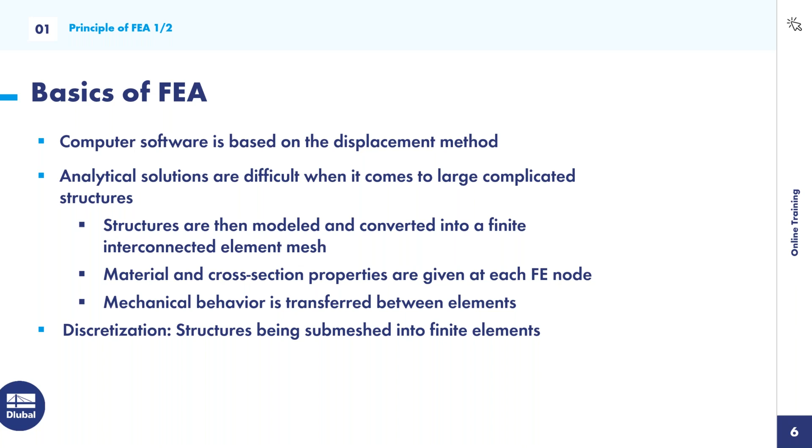The next thing to briefly get into is the FEA calculation workflow. Now, I'm no expert on this, and I just want to give you the overview and the basic general knowledge of how the workflow is listed in step-by-step form and how it works within an FEA calculation.

The first step the program goes through is determining the local element stiffness properties. Second, the program changes stiffness properties at each node and converts this into the global coordinate system. Then the composition of the entire structure takes place. Boundary conditions or supports are then defined, and these can consist of sliding supports, rigid supports, and hinge supports, for example.

Fifth, the displacement vectors can be determined by solving the system of equations, just like we spoke about. And lastly, the support forces and internal forces can be determined, aka the results of the structure. So with the general knowledge of how the workflow works for FEA, we can dive into our next example, which will be our continuous plate example.

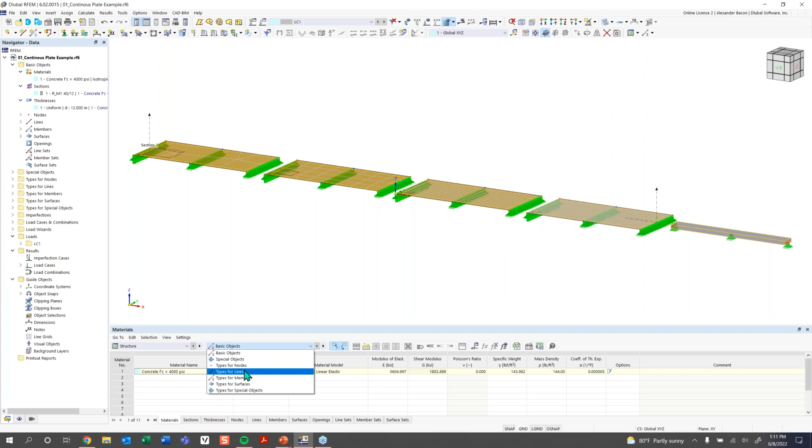And basically anything can be edited down to the coordinates of a node. So if I go to basic objects and node, you can see we have our coordinates for our nodes here, and these can all be adjusted. Also within the tables, if any design work is being done, this is where all of the input data and results are going to be shown.

Next, you may notice that my background in my work window is white. Sometimes it can be black by default, if you've just recently downloaded RFEM. The color of the background can be changed to whatever you would like. So for example, if you go up here to options and you prefer a black background or a white background, that's under display properties here. And in the general category, we have background here. And then you can see you can change your background color to almost any color you'd like. So I'm going to keep mine as white, as I think for presenting it allows you guys to more easily see what I'm working with.

And that leads into the work window. So here's the work window. I can rotate my model, I can play around with it, I can manipulate it. So the work window is where almost all of your modeling will get done. Right now I have my grid turned off. If I turn my grid back on down here, you can see I have my grid points and everything. So this is basically where all of our work will be done and all the modeling will be done.

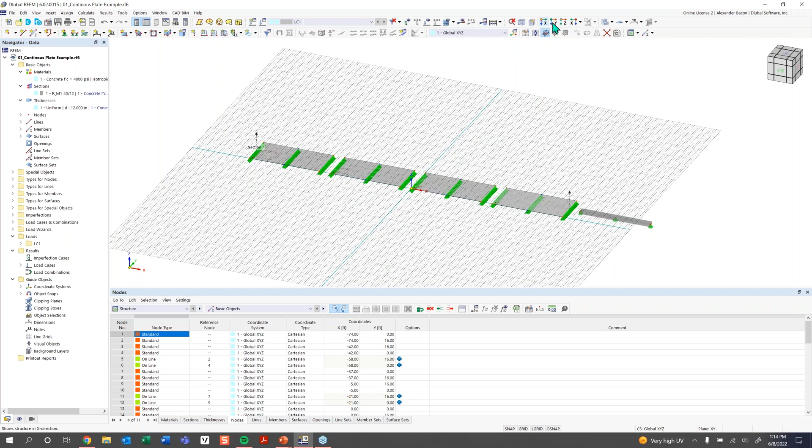Next we have the views up here. You can use these view buttons to change the view of your model, like so. A new addition is the cube up here, which also allows you to change your views. So this is one way to look at and change the view of your structure. You can also hit this button and it will give you an isometric view as well.

Next, in the navigator here, right now we're looking at the data panel. There are multiple tabs down here in the navigator. The first tab is called data. The second tab is called display. Within this display tab, I can collapse all of these subcategories, such as model and results. The display tab just allows you to turn graphically off and on anything that's shown in the window here.

It doesn't deactivate or remove anything from your model structurally. It just deactivates the graphics. So if I went under model here and turned off surfaces, you can see the surfaces disappear. This doesn't actually remove the surfaces from the structural analysis portion, it just turns off the graphics. So here is where you can turn things on and off graphically. You can turn numbering on and off. So that's the display tab.

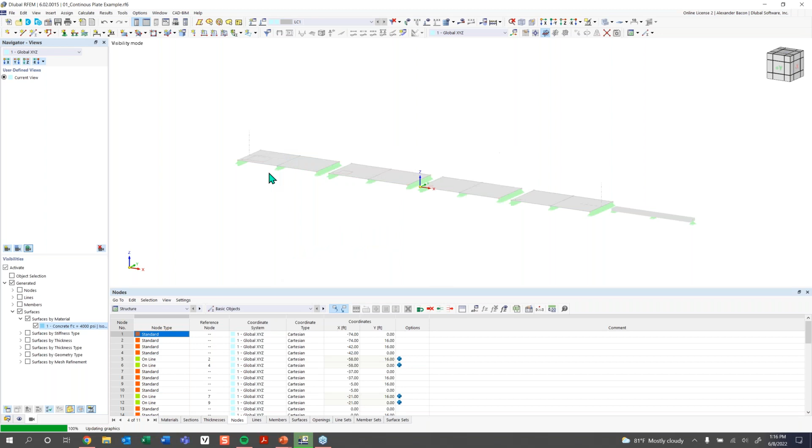Next, we have the views tab. This works a little bit similarly to the display tab, but with a function called visibilities, which can be activated. Once I activate visibilities, I don't have anything visible in my model that's deactivated. But let's say I only wanted to view surfaces that have a concrete material. Once I activate the,

Okay, so a little bit of a crash there. Let's just reopen RFEM by closing out of that. And we can open RFEM back up. Sorry, everybody. One second.

While that's opening up, which should only take a couple seconds, we can give a poll. Throughout the training, I will be giving questions, and I would like to give this question. That will launch now. If everyone could read it and answer it, then we can go over the results and correct answer afterwards. I'll give everyone a minute to do that, and we can continue after that.

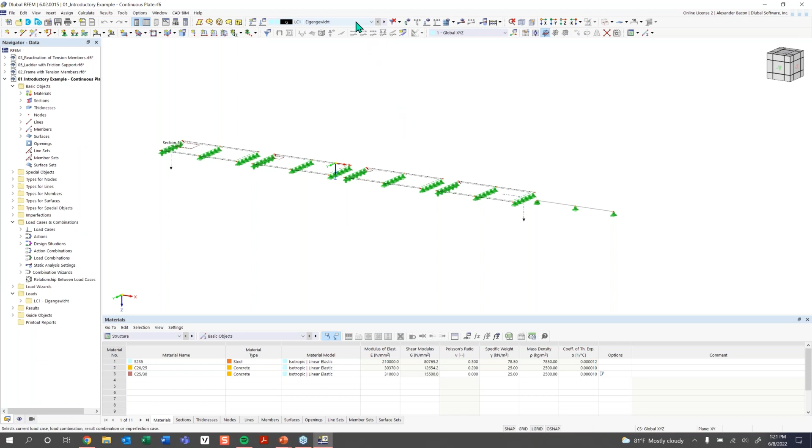Now jumping back into RFEM, the next thing I want to do is quickly run an analysis. We're just going to run the results of this model real quick.

And then we're just going to quickly go over the results, nothing in detail. So I just wanted to show you that once the results are run, this fourth tab here in the navigator panel is going to appear. As you may have seen before, we only had 3 tabs, but now that the results have run, we have 4 tabs.

And then you're going to see these collapsible categories here. So we can either show our deformations, member results, or surface results. And this is how you turn on and off the results you would like to see in the work window on the right-hand side here. So things like member internal forces, such as normal axial forces, shear forces, moments, torsional moments, things like that you can view on your members. And same with surfaces, you have internal forces and stresses, etc.

And also, when you're manipulating your model within the window here, if you have a mouse with a scroll wheel, you can click down on that middle scroll wheel button to move your model in translation. You can hold Control and click the middle mouse button to rotate the model, and then you can use the scroll wheel to zoom in and out.

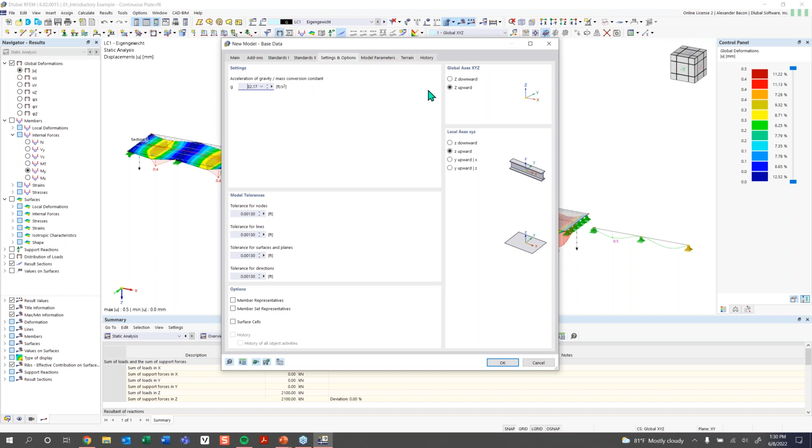And now everything else we don't need to worry about. These other tabs we're going to skip for now. And all we need to do now is click OK. So once we click OK, a blank model will open up. Sometimes materials from other models can be carried over into this blank model. So I'm just going to go under here and delete those. Maybe some other sections can be carried over as well that are previously defined. I'm also going to delete those along with some thicknesses that were defined as well.

So now you can see in my work window, I just have a blank grid here. Now this grid can be customized. So let's go into the settings for the grid plane here. You can see we have grid points here. So if we go up here to this button, settings of work plane, grid/snap, etc. If we click on this, we can take a look at our settings for our grid here. So right now, the basic information is that we have 50 by 50 grid points here. Right now, my units are in meters, as you can see. So those points are spaced by meters.

I know this is an international training, so that's why I want to show you that we can switch between imperial units and metric units. And you can do that in almost any dialog box. So you can see there's this button down here, units and decimal places. If we click on that button, you can see under model, all of my units that are related to modeling are all in metric right now.

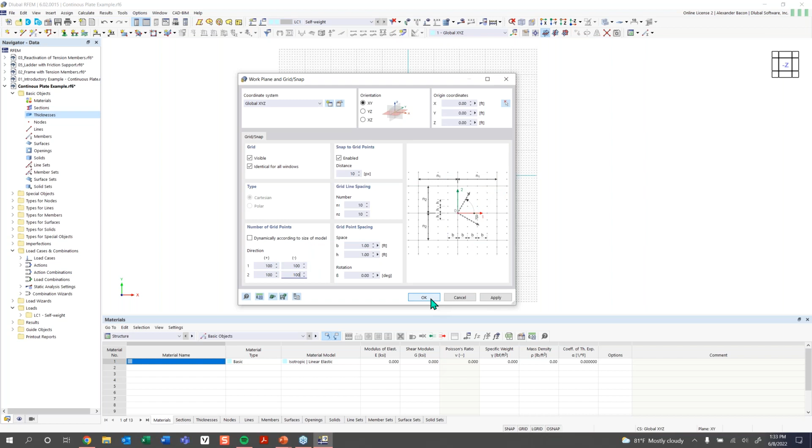For this model, I would like to change this from 50 by 50 to 100 by 100. So we can take that and I can just copy and paste the rest of this. So in the positive and negative direction and in directions 1 and 2, which you can see in this graphic over here on the right-hand side to help you understand that, it's going to be basically a 100 by 100 grid. So I'm going to click OK. And now you can see my grid here is, just going to save this real quick.

You can see my grid here is 100 by 100 now. Now that we have the grid set up correctly, we can start to model our first continuous plate. So I'm going to zoom in here.

I'm going to go up here to New Rectangular Surface, and this is the first tool that we want to use. So I'm going to click on New Rectangular Surface to create this continuous plate, and now you can see this dialog box will pop up called New Rectangular Surface.

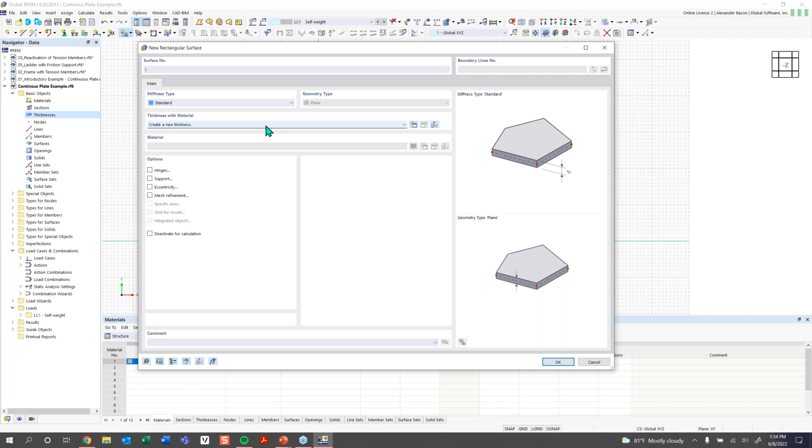We just need to define a material for this surface and a thickness for this surface. So first, we need to define a thickness. I'm going to click on Create a New Thickness here, and the new thickness dialog box will pop up. Basically with the thickness, you can see what that is defining on the right hand side here.

Normally you can think about this as with a beam member or column, that column requires a material and a cross section. So as an analogy, you can think of the thickness as the cross section, and then we just need to give it a material. So every surface requires a thickness and material. We're going to make the thickness of this surface 12 inches.

And then we're going to go here to material. When choosing a material, you want to click on the button Import from Material Library. Under the Material Library, you can see there is a filter section on the left hand side here. You can see you can filter by region, and we have a long list of regions that you can pick from to find your material.

For this training, I'm just going to use some US materials. So I'm going to click on United States, and then I'm going to click on material type, concrete. Once I filter to the material type that I would like, you can see for concrete, there's the subtype of material. I'm just going to choose regular old concrete. And then the standard, we have the ACI for the American standard for concrete. You can see I can choose between different older standards or the newest standard. I'm just going to choose the newest one.

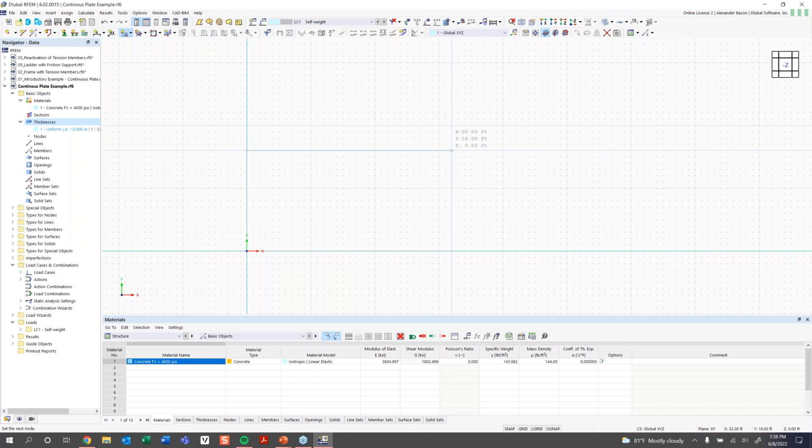So we're going to first snap to the origin here. I'm going to left click on the origin, and this first surface is going to be 32 feet by 16 feet. So I'm going to go 32 feet in the X direction, and then 16 feet in height. With the rectangular surface, all you need to do is define 2 corners, and so now you can see my surface is defined. Now all I need to do is either hit escape, or I can right click anywhere and simply exit out of that tool. Now the next thing we want to do is draw a line down the center, directly in the middle of this surface.

To do that, we can go up here to the option New Line. So you'll see the New Line tool will pop up, and now I can simply snap to the center of the top of this line here, left click, and just draw this line on top of this surface like so.

So that's how you can create a new line and draw a new line. We can right click out of that, and right click again to exit fully out of that tool.

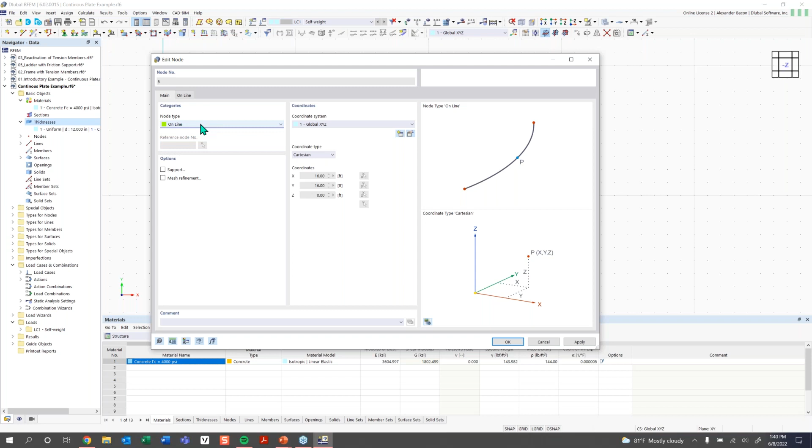Now you may notice that these nodes here are a different color compared to the corner nodes. If we double click on one of these nodes to edit them, you can see these nodes are set to the node type On Line. This means if I click OK, these nodes are integrated into the line they're connecting to. If I double click on this line and go to the Nodes On Line tab, you can see the node is being recognized and connected to the line I'm editing. If this node was set to the normal standard type, it wouldn't be integrated into the line it's connecting to. This is done automatically, but it's good to know there are different node types.

Now that we have our concrete surface here, we want to support it. So we want to continuously support the left-hand side of this plate, which means adding a line support to this line on the left-hand side.

To do that, we can double click on it to edit it, and we have a list of options here. We want to add a support to the line, so this tab, Support, will pop up. Under line support, we can hit this dropdown, and you can see we have a couple of preset definitions for what our line support should be.

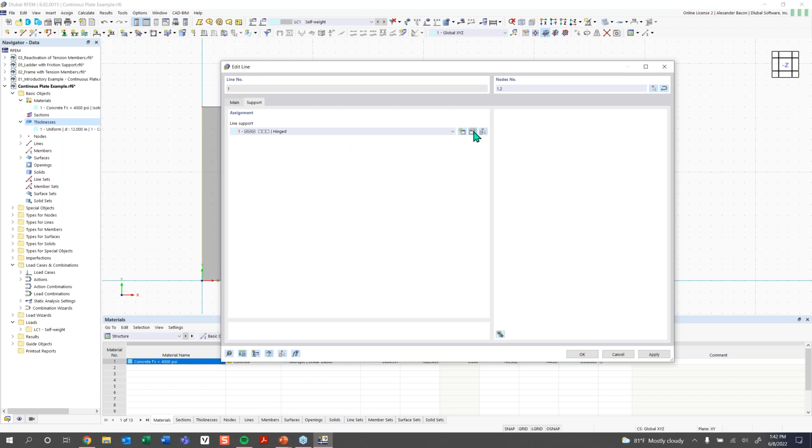I want this to be a hinged line support, which means the first three translation degrees of freedom are fixed, so the support can't move in the X, Y, or Z directions, but rotation is fully released. That's a hinge support, and this is what it's going to look like. We'll click OK, and click OK again, and now if I rotate the model, we have our side fully supported by those hinge supports.

Another thing to point out is if I double click on my line here in RFEM, you will always see the nodes making up your line. Also if I edit this line support, you always see the assigned line that goes with it. So in RFEM, you're always going to know what objects are connected to each other by this upper right hand corner, which helps you understand what's connected to what. So always check there.

Now we can highlight the other two lines we'd like to add supports to. If I hold Control and select these lines, there's also a button up here called Assign Line Support. I'll select that tool, and RFEM remembers my selection before I clicked on it. You can see lines 3 and 5 are selected.

None of these presets are the definition of line support that I want, so I can create my own by clicking the new definition button. I want this support to be able to slide in the translational X direction, so I'm going to uncheck UX, which fully releases that direction in global X, but it's still supported in Y and Z, and rotation is still fully released about the X, Y, and Z axes.

I'll click OK, click OK again, and now you can see those supports are added to my lines there.

Next thing we want to do is create a surface load, but before we can do that, it's very important to know that any loading applied to your structure must have a load case assigned to or associated with it.

So the next thing we want to do is create a new load case. You can see we already have our LC1 load case created by default—the program will always have a load case already created. What we can do is click on the edit active load case here to look at that.

So this is where you can create load cases. You can have multiple load cases, and these will go into your combinations. We're not going to get into that this training. We're just going to focus on one single load case here. It has no action associated with it. We don't need to worry about that since we're not doing any design or load combinations.

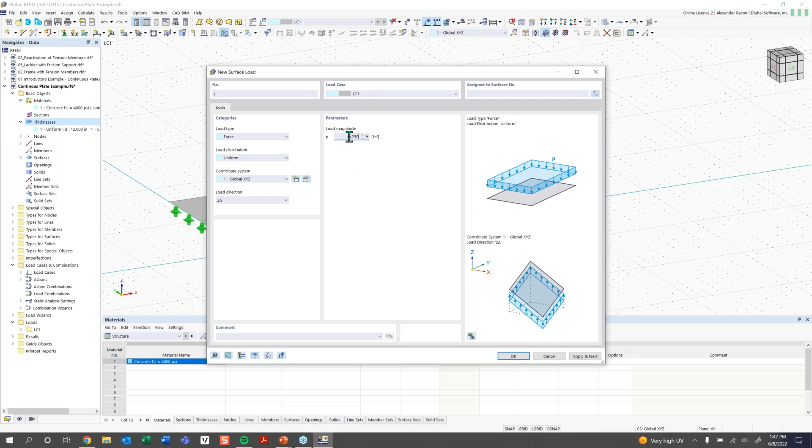So the loading, we just need to give it a magnitude. It's going to have a magnitude of negative 0.25 KSF, or kips per square foot. And we give it a negative, so it acts into the negative direction. So we'll click OK.

And then all I need to do is tell the program which surface to assign this to. So we'll assign it to this first surface here. And now you can see visibly or graphically our loading here. Something else you can do is right click on this loading and you can adjust the size of it using this slider here if you would wish to do so. So yeah, now we have our plate here, it's supported, it's loaded.

Next thing I want to go over is now the FE mesh settings, which are very important if you have a surface or any surfaces in your model. So to access the FE mesh settings, we can go up here to this button, hit this drop down, and we can access what's called the mesh settings here. And this is always important to look at before you run any results. You can see these are the general settings, and right now under target length of finite elements, this is set to 1.64 feet, and this is going to be the global length that a finite element is set to throughout your entire model.

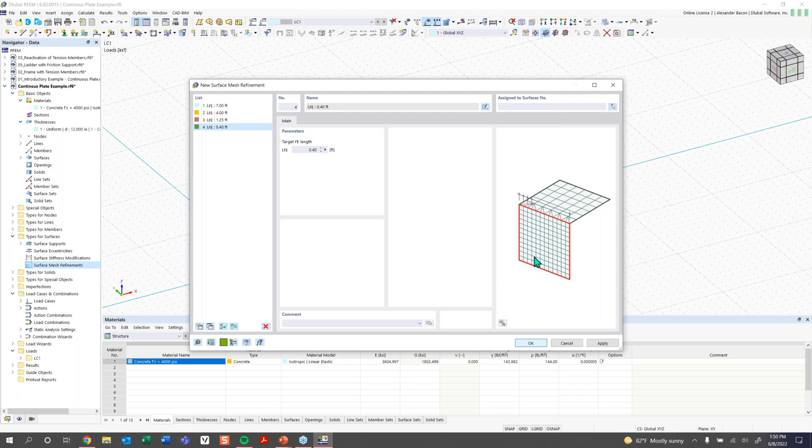And the next thing I want to do is make a copy of my surface here. So I'm going to highlight the whole thing here, and I'm going to use what's called our move/copy tool. With this tool, you can move something or make a copy of it, or do both at the same time, which is what we're going to do. We're going to create a copy, and we're going to create 3 copies of the surface. And we want to displace them 37 feet into the X direction. What this allows for is a 5-foot spacing between each of these copies, since the surface is 32 feet long. And so now all we need to do is hit OK.

And now you can see I made 3 more copies of my surface here with all these supports and everything, and they're each 5 foot spaced apart. So now with our copies made, we want to create our single member, or our beam member, that we're going to use to compare results to.

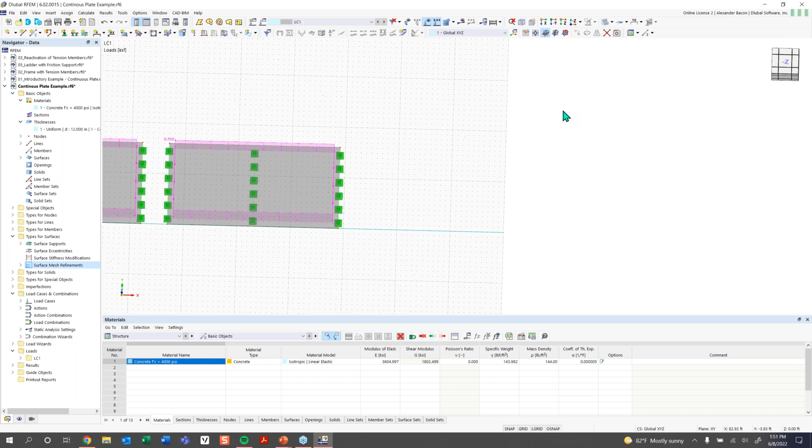Now to do that, you can see we're going off my grid here a little bit, so I'm just going to highlight all of these plates and drag them to the left a little bit so we have some space here on the right hand side to model the member. So I'm going to hit reverse z-axis direction, and then I'm going to go up here to the button create new member.

Under new member, we're going to use the member type beam. This member type allows the member to take tension and compression forces and have fully fixed connections. What we want to do now is tell the program what cross-section this member is going to have and what material it's going to be made of. So to define the cross-section, we can just go down here to section with material and click on this button, import from section library.

Now here is the cross-section library that's in RFEM 6. You have different categories here. The category we're going to be focused on is the massive category, which is where we can choose our massive rectangle section. And with this section, you can see we can define our material here. I already had a preset of our concrete 4000 PSI material, our isotropic linear elastic material. And if this wasn't already defined, you can click on the material library, and this is the same material library that we've looked at from the surface.

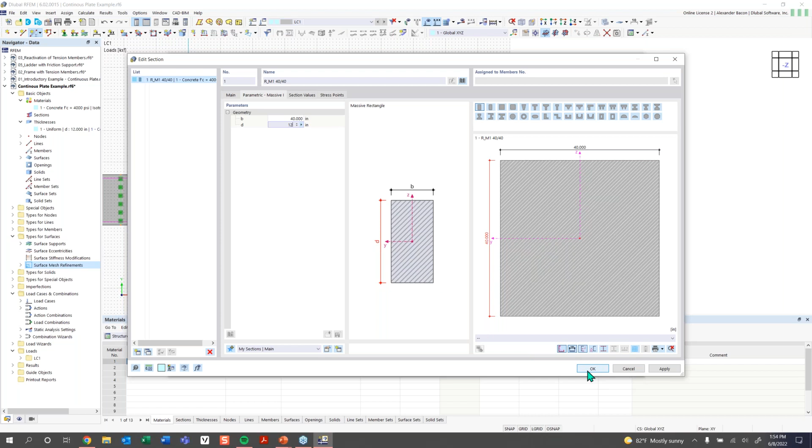Next thing we want to define is the parametric massive, or the dimensions. So we're going to go under the parametric massive tab here. I'm going to define the base, which is going to be 40 inches, and then the depth of the section is going to be 12 inches. So you can see how this is going to be similar in depth to our surface, which is what we're going to be comparing to. So with that defined, we can click OK and click OK again.

And now I can just draw my member, just like how I drew that line from before. I'm going to start drawing it 5 feet away from our plate here, right in the center. And I want this member to be the same length as the plate, which was 16 feet. So I can draw that 16 feet, or I can just type it on my keyboard without moving my mouse, 16 feet, and hit enter. And I actually wanted to make that 32 feet. Sorry about that. So Control Z real quick.

Let's see, draw that one more time. I actually wanted that to be 32 feet. There we go. Then I can right click, and now you can see we have our member drawn the same length as our plates. Now this member is just floating in space right now, so we need to support it. I want to add a support directly in the middle of it. To do that, I need to add a node.

So what I can do is divide this member by right-clicking on it, and you'll see my shortcuts menu will pop up. I want to go under member, divide member by a number of intermediate nodes. We really need to divide it by one node, so we're adding a node to the middle of the member.

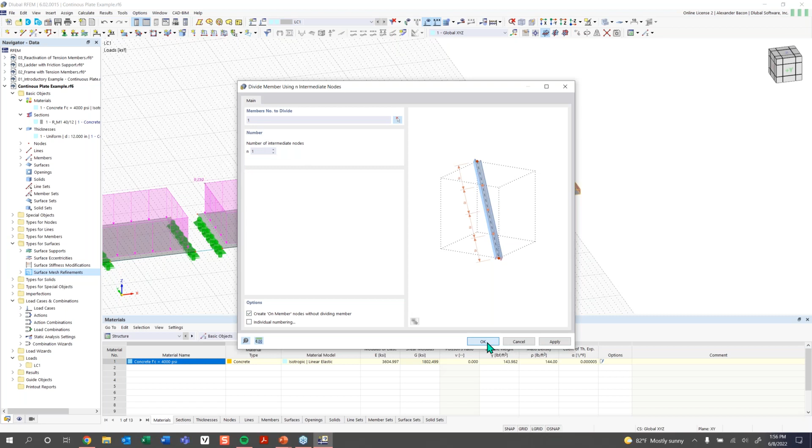But one critical option to turn on before doing this is create this node on member, so that adds the node to the member without dividing it. We don't want to divide the member, we want to keep it as one single 32-foot long member, just with a node in the middle. So we'll turn that option on, divide it by one node, click OK. And now it's a little hard to see that node, but it's right there.

So now if I just highlight this first node here, we want to add our nodal supports. So I'm going to go up here to nodal support instead of line support, since this is for nodes. We'll click on nodal support. And we want this support to actually not just be a hinge support. You can see we have some presets here for nodal supports. We're going to want to create our own definition here, and I will explain why in just a little bit.

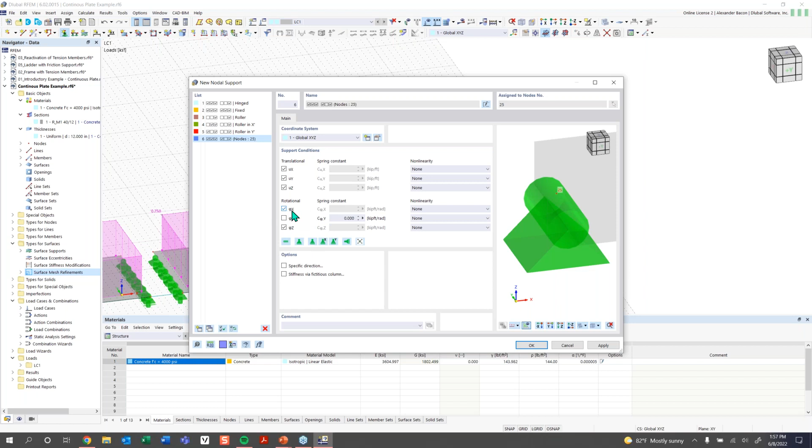But we want all of our translational degrees of freedom to be fully fixed, but we also want our rotation about the local x-axis of our member, or about the global x-axis of our member, to be fixed as well. So we're going to click OK. Click OK again, and so now you can see that support, the rotation about the x-axis is fixed there.

And now we're going to add in our other supports. So our other two supports for the middle and end of our member are going to be rolling supports that are allowed to roll or move along the global x-axis here. So we'll click OK. Oh, I just changed the support by accident. Let's just undo that. So again, we're going to choose rolling support. And with this, now we can just assign our support to our nodes here.

So the reason we needed to fix the rotation of the local x-axis for this one is if we didn't do that and all of these had the rotation fully released for all 3 degrees of freedom, this member would be allowed to spin about its own local x-axis indefinitely, causing an instability in the program. So always keep that in mind when you have a member that has torsion fully released on it, as that can cause an instability in the program.

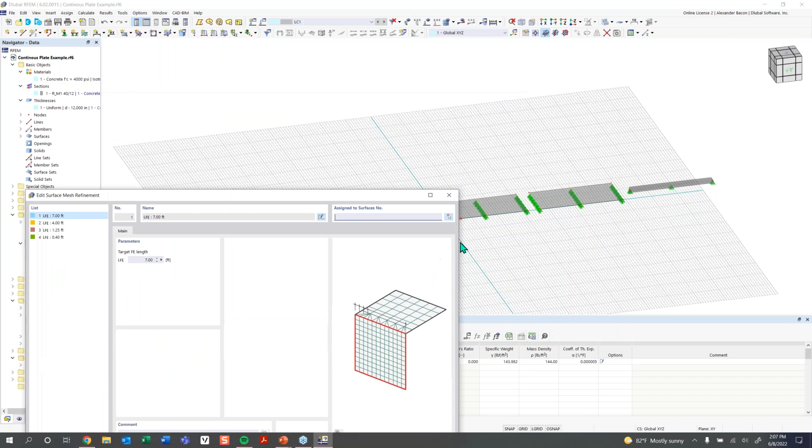So what we want to do is I'm just going to right-click on surface mesh refinements, hit edit, and go through here and assign them to our surfaces. So we're going to assign this first one to our first surface, and you can see we can do that graphically by hitting the button there and clicking on our first surface, clicking OK. We can do the same thing for our second refinement. Select surface here, select our second surface,

and then for our third one, again, we can do the same thing graphically, or if we know the number of our surface here, we can just type in 3, since this is surface 3 here, and then type in 4 for our last refinement, and hit OK. So now they change from blue to normal default color, and you can see we have these icons here now on top of our surfaces. And this is how you know that there's a surface mesh refinement on top of our surfaces here.

So now that we have those refinements, we can generate the FE mesh. To generate the FE mesh, you can do this manually. Normally this is just done once you run your results, but you can generate this mesh manually. So if we go up here to this drop down and hit generate FE mesh, this will run the solver, and then our mesh will be displayed on our surfaces here. It's hard to see because our surfaces are gray and there's a grid. So what I can do here is just turn off the display of the grid since we don't need it anymore. And I can turn the rendering from a transparent model to wireframe model.

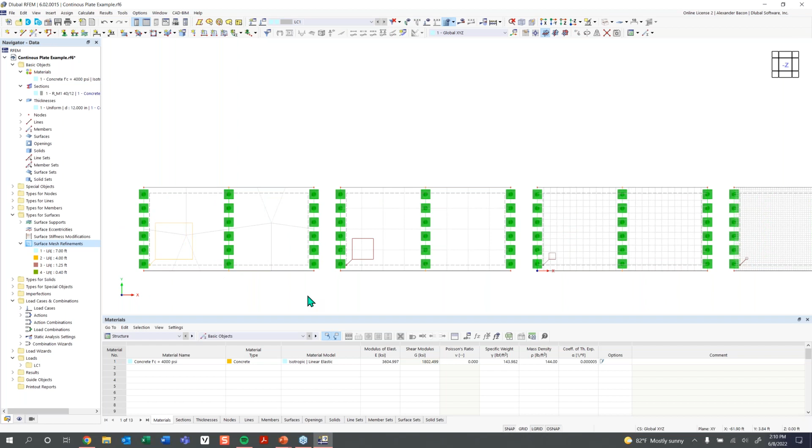This first size was 7 feet, and you can see it goes from 4 feet to 1.25 feet and gets smaller and smaller. So this first surface here, I would expect very inaccurate results from this surface. And as we move from left to right, the quality gets better, and I would expect very accurate results from surface 4 here on the right hand side.

So the next thing we want to do now that we created our FE mesh is add in a results section that will cut through our surfaces here. So to do this, we can go up here to this button, set new results section. And to set a new results section, it just needs 2 points, point A and point B. We can click on this button up here, select 2 points graphically, and you can see I can snap to the center of my first surface here.

And I'm going to draw this results section all the way through all of these surfaces here. So now we'll have a result plane section cut through all of our surfaces. And this is based on the global coordinate system, and it's going to be set in our global Z-axis. So that's where the plane will be located, projection direction, and we can click OK. And now you can see we have these arrows here for our section cut. So it is in the global z-axis plane, and that's how our results will be shown.

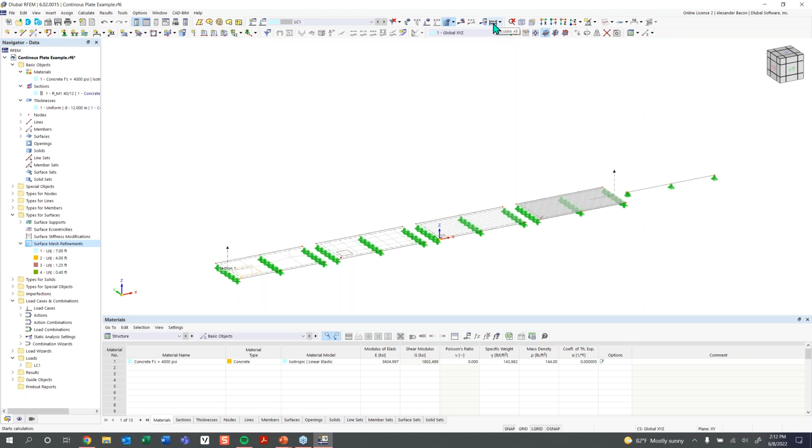So now we can calculate our results. We can go up here to this button called Calculate All. I'm going to click that, and RFEM will run through the solver and go through that FEA workflow that we talked about earlier and give us our results. Right now it is showing us the deformations, and also you'll see the results tab will pop up here. And whenever you run your results, I always recommend taking a look at the global deformations first. This is always just an easy first visual way to check that everything is defined correctly and everything looks as you would expect.

So if I look in this side view here of our model, the deformations are looking good, and they're looking just as we would expect them to look. Now, whether this side is accurate or not is up for discussion, but the internal forces are the next thing we can take a look at. So we can turn off global deformations up here and check on members here.

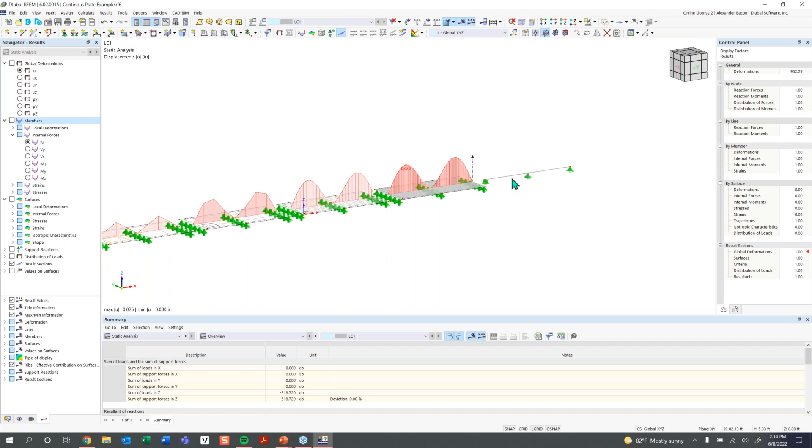And before we check on the results for the members, what we want to do is compare the results of our last surface here with the results of our beam here. So what I'm going to do is select my surface here and select my beam. And what I can do is create a visibility by selected objects using this button.

And now you can see the other objects have been grayed out in the background, and now the only ones visible are the plate here and the beam. And what I'm about to show you is very important. So if we take a look at the results on the member, I'm going to check those on. You can see, one second, that my internal forces should be shown.

Oh, so what we need to do is check on moment. So we have checked on the results for members, and then under the internal forces here, we want to check on moments about the local y-axis. So that's what's being shown right here on our member, the moment about the local y-axis of our member.

So if you ever need to see how the local axis of the member is oriented, you can right click on any member and turn on the local axis system of the member. And so now you can see what that local axis system looks like right on the member, and you can see the moment distribution about the y-axis here. Let me turn that on.

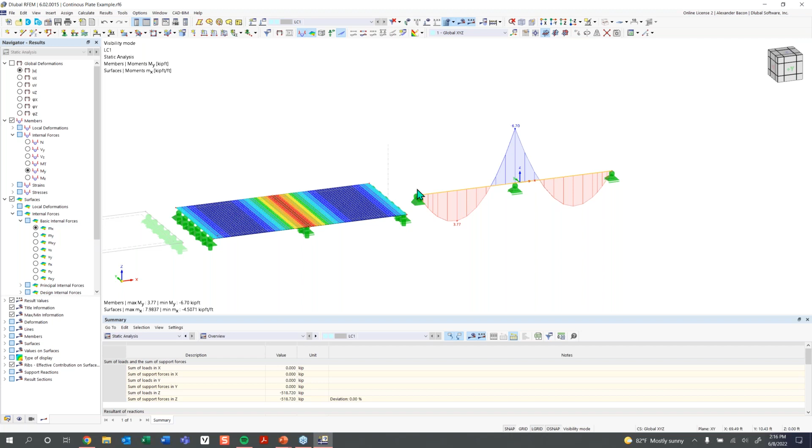This means that for the surface, these are our bending moments in the direction of the local x-axis of the surface. So if I right-click on the surface, I can turn on the local axis system, and you can see the direction of that. And so we're showing the moments along that axis.

And so now I'm going to have to cancel out of this visibility. If I select these plates and members, there we go. So now you can see we can compare directly the moment distribution between our beam and our plate here. And these should be basically the same.

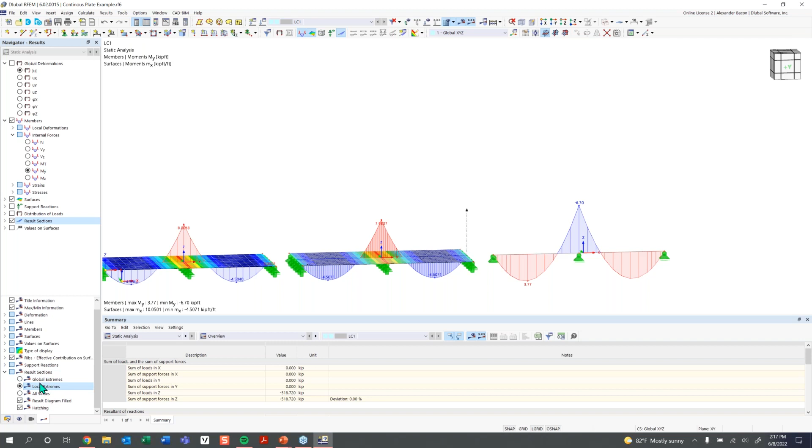So I'm going to also turn on results sections down here, turn on local extremes. So you can see that we have our results here, and they should be pretty close to the beam. And also we can show our shear force distribution as well. So I'm going to turn on the shear force in the Z direction, and then turn on the shear force for our surface in the X direction. And so we can compare those two.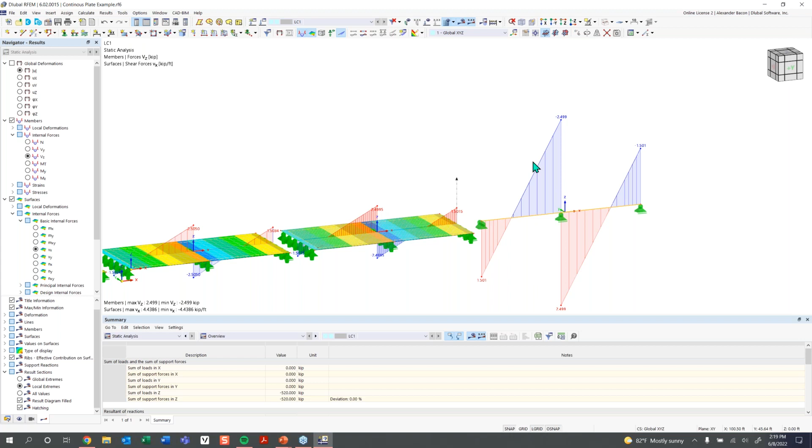Okay, so now you can see we have a max shear force here of 2.4995 and a max shear force here of 2.499. So between our plate and our beam, we're getting very similar results. So this is how you can view the internal forces of a plate or beam.

And I just want you to keep in mind for these forces here what the lowercase axis symbol shows, and these all refer to the local axis system of what they're showing, for surface and beam. So I'm going to clear those visibilities.

Also, there was a question about how to show the values on a surface, so I'm going to show that real quick. To show the values on a surface, we can simply go down here to values on surface and check that on.

And then you can see that the value is shown for each, if we go down here to result values, or we have to go to, if I can find it. So we have values on surfaces turned on, and then right here under values on surfaces, right now each value is set to a grid point. We can also change this to each FE mesh point, and you can also turn on symbols and numbering.

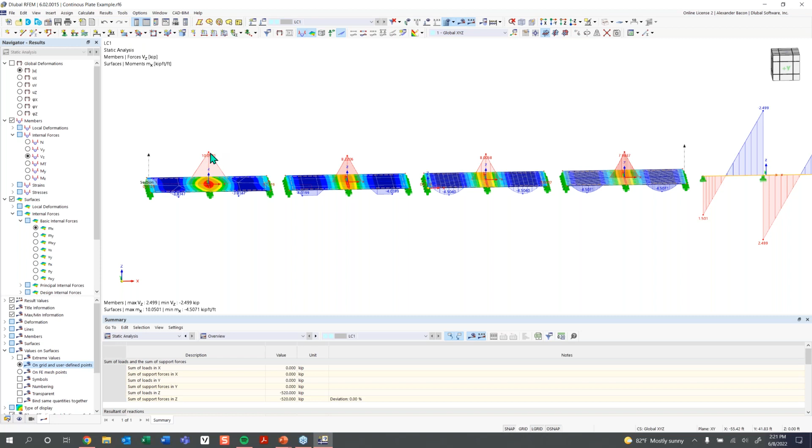So if we take a look at each plate here, you can see that the bending moment is different for each one. Starting with this plate here, we have about 10 kip foot, and you can see how that's decreasing, and each plate here with a decreasing mesh size is getting closer and closer to our control member here, which is what the result should be closer to. So you can see how inaccurate the results are for this plate with the super coarse mesh size.

So this shows the importance of making sure that your FE mesh is as fine as necessary, but as coarse as possible, because if you don't check on your FE mesh before running results, they can be inaccurate. But also, it's important to keep in mind that if your FE mesh is too fine, such as this last plate here, this can increase your calculation time. So if you have a large model and too fine of a mesh, your calculation time can greatly increase. So what I recommend is something like this third example here, where it's as fine as necessary, but as coarse as possible.

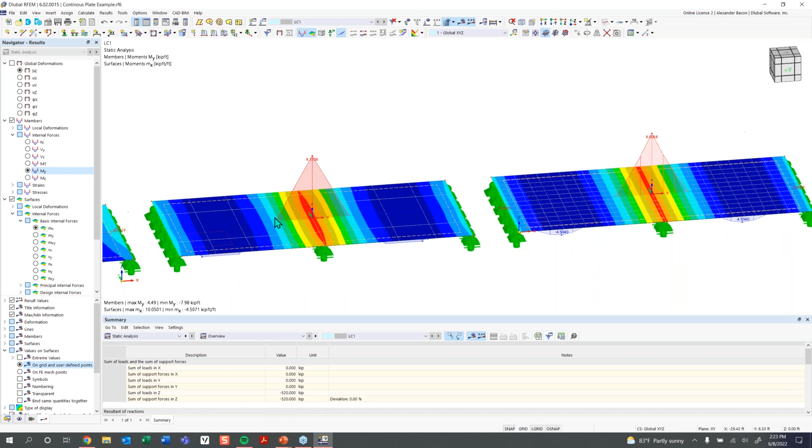And another good rule of thumb to keep in mind is to have at least 4 FE mesh blocks between any span or boundary of your surface. So 4 FE mesh blocks between any line here is usually the minimum you want your mesh to be at. So something like this would be too coarse, where we only have about 3 FE mesh blocks, or is that we have 4. So this would be about the minimum of how fine you would want your mesh to be. But as you can see, the finer the mesh, the more accurate the results.

So next thing to look at real quick is the result diagram of our section here. So if we right click on our section, we can take a look at the result diagram. So right now we're looking at the internal forces mx along our result section here. And this is interesting because you can see what changing your mesh size does, as a finer mesh adds more data points along this line here. And the more data points, the better our moment diagram starts to look. So you can see it starts off very rough and then gets finer and finer.

Now I'd like to get into talking about shear stiffness. So with shear stiffness, such as for this beam, for example, if you want to do hand calculations and compare them, you would have to take into account shear stiffness effects. Taking into account shear stiffness leads to things like increased deformation due to shear forces, and that also leads to, in turn, increased moments. So this also plays a major role with things like concrete, because the thicker something is, the more shear stiffness deformation effects you will have.

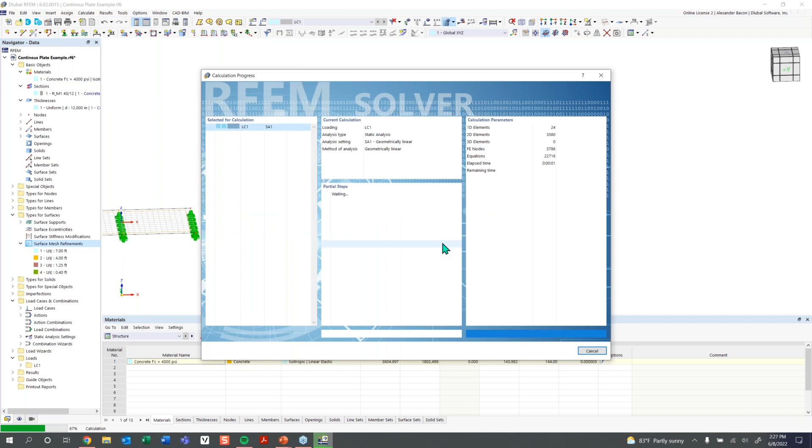So if we deactivate shear stiffness and click OK, the program's going to tell us this is going to require us to delete the results. We'll click yes, click OK again, and now we can run our results again, and we should see our results change based on checking off this option.

So now you can see we have an increased moment here a little bit. Results haven't changed too much, but the moment has increased slightly, and this is because we deactivated the shear stiffness, or taking it into account with this beam.

So now I would like to give another question, another poll. I'm going to throw that up on the screen now, and you should see it in just a second. I'll give everybody a minute to answer, and then we'll go over the results and answer afterwards.

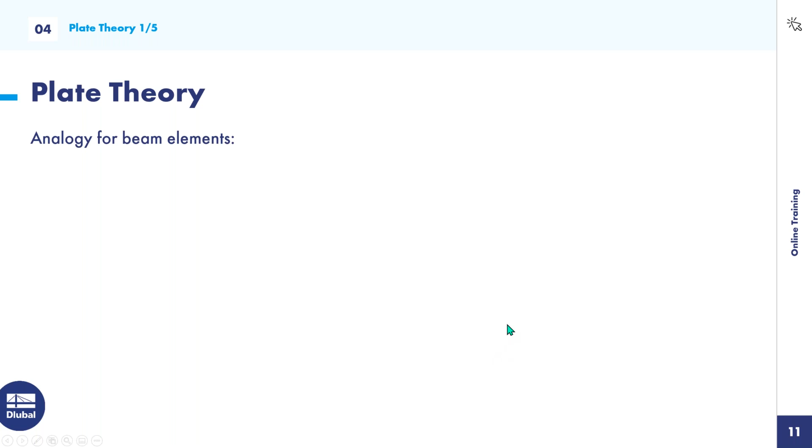Before we get into plate theory, I'd like to make an analogy between plate theory and two theories for beam elements. The first theory for beam elements is Bernoulli's, and the second theory from there is the Timoshenko theory, also called the deep beam theory.

With Bernoulli's theory, we're making some assumptions. First, that the cross section remains in plane and also perpendicular to the member axes. The second assumption is that we do not consider any shear deformations, meaning the shear stiffness of the beam is completely rigid. These are the assumptions made with Bernoulli's theory, and this is what you're probably familiar with when doing hand calculations.

The assumptions we make with the Timoshenko theory are that the cross sections remain in plane, but they don't remain perpendicular to the member axes. So shear deformations are taken into consideration here, and the shear stiffness is limited, not completely rigid. This is the more realistic approach, and you can see that we're not only considering deformations from bending, but also deformations from shear as well.

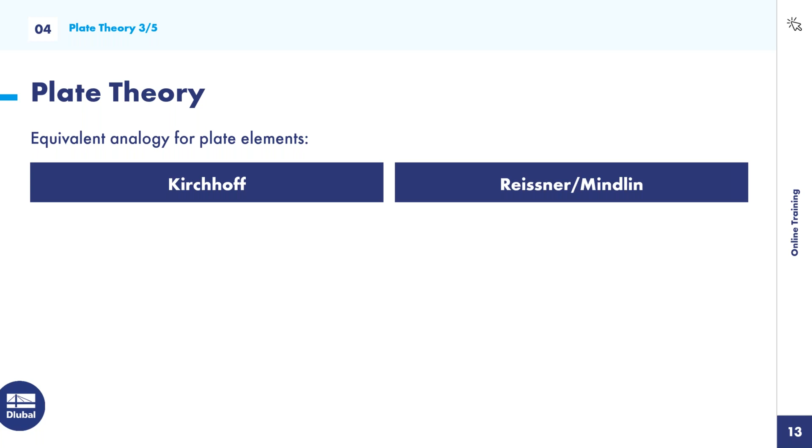So here are the assumptions. For Kirchhoff's theory, we assume a geometrically linear or small deformation analysis, a linear elastic material using Hooke's law, that the cross-section remains flat with no warping, and that the plate has constant thickness. The biggest assumption is that there's no consideration of shear deformations. That's Kirchhoff's theory.

Now, with the Reissner-Mindlin theory, we're assuming basically all of the same assumptions, but the major difference is that we are taking into consideration shear deformations, and including this, we are taking into consideration transverse and lateral strains. To clarify a little bit more on transverse and lateral strains, we can go to the next slide here.

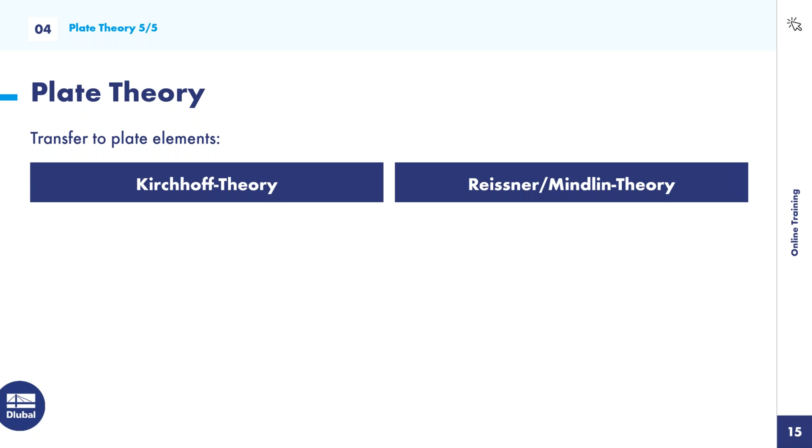So again, just to summarize, Kirchhoff's theory for plate theory yields pretty good results when using very thin plates, for example concrete slabs, like the ones we're using in our example. But you have to keep in mind this only considers pure bending load bearing capacity, and this is just a simplified approach, but works fairly well for thin plates. Again, no consideration of shear deformations with the Kirchhoff theory.

The Reissner-Mindlin theory, on the other hand, is great for thin plates and thick plates. The thicker the plate gets, the bigger the delta you'll see in the difference of results, and the more inaccurate Kirchhoff's theory becomes because of the shear deformations. The effect of shear deformations will greatly affect the thicker plates. In my opinion, Reissner-Mindlin theory should just be used by default, but it's good to know the difference between the two.

Now we can go back into RFEM and look at where these settings are located. If we go under the navigator here, under data, we can go under the load cases and combinations and go under the static analysis settings, under the geometrically linear settings, and edit these. If we edit them, we can go under basic settings here, and you can see that the plate bending theory can be changed between Mindlin or Kirchhoff theory. Mindlin should just be used by default, but it's good for your knowledge to know we have the option between these two theories.

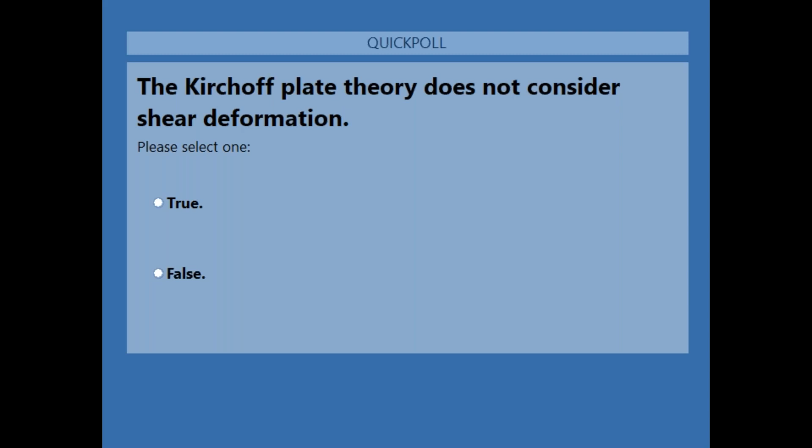All right, so I'm going to close that question and share the results. Awesome, everyone got this one correct. The Kirchhoff theory does not consider shear deformations, that is true. The Mindlin theory does consider shear deformation, so great job.

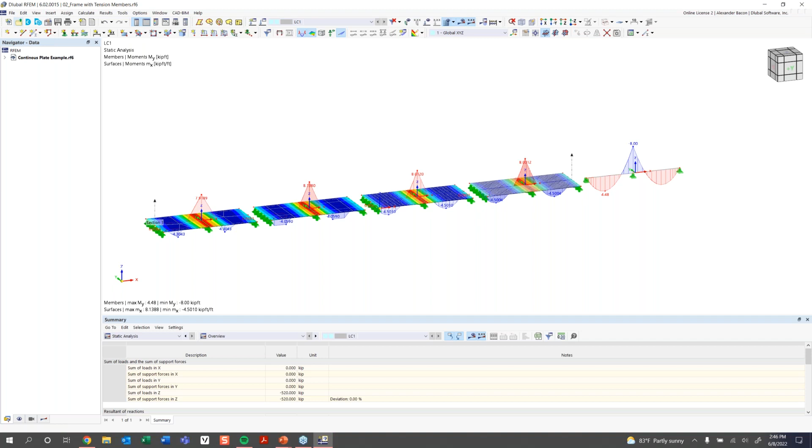For this model, I set up a frame, and this frame has some tension-only members in it. If I double click on one of these members here on this cable element from this X bracing, you can see that the member type here is set to tension.

With this frame, we're going to just imagine that the top of this frame here is connected to another building. I'm going to turn off the grid here so we can imagine that the top here is connected and braced by another building. We need to basically brace this wall in the global X direction here, and this is the reason why we needed to add this X bracing in.

This X bracing, we're assuming that these elements can only take tension, almost like a cable element where the cable or rope just cannot take compression forces. This is a nonlinear element, meaning that it can only take tension.

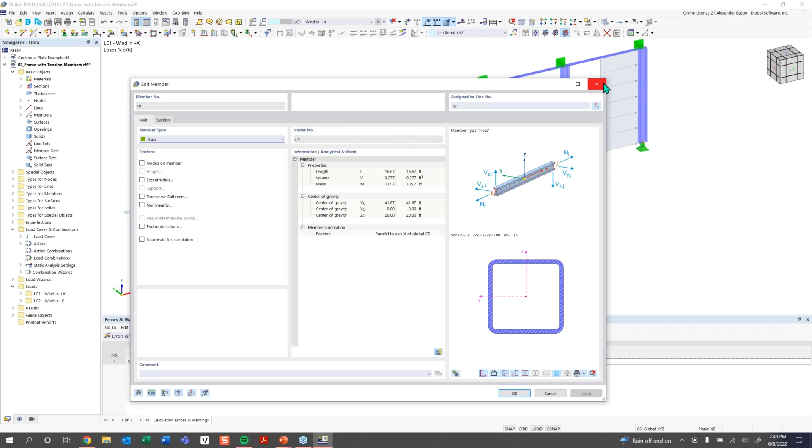The reason for this is because our structure here is just not stable and needs support in the global x-axis. You can see that we have all hinge supports here. These supports up here are not providing any support in the x direction, and all of our connections here are hinged, and our members up here at the top are truss members, meaning that the moments at these connection points are fully released. So this whole model is just not supported in the global x direction.

So what we need to do is stabilize this model. How can we stabilize it? We can do that by adding in X bracing. So I can go up here to new single member, and under new single member, you can see we have member types. So we have beam.

Beam type is the type you are going to be most familiar with. This can take tension and compression and has fully fixed connection points, meaning moments and shear forces are transferred between connections. We have a truss type here. It can only take axial forces like tension and compression, but the connection points are fully released, so no moments are transferred between connections.

And then we have our tension members. Our tension members can only take tension and cannot take compression. So these are our nonlinear members here. What we want to do is go into our section here and change our cross section to a 1/4 of an inch round section, which will act as our cable element.

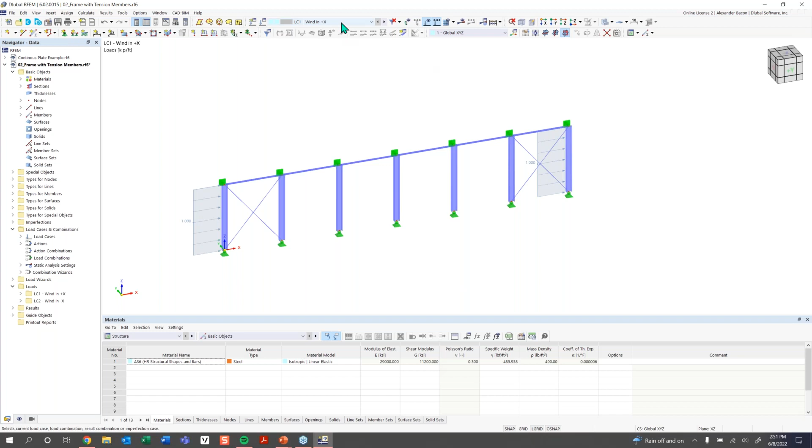And so now we have our X bracing. So now this structure is braced in the X direction. And so now let's try running our results again. So now you can see that we have our results. And if we take a look at our deformations, we can turn off our loading.

You can see that this member right here has extended since there's a wind load on this structure forcing it into the X direction. You can see that this cable element is still activated and taking on those tension forces. But this one here has been grayed out and disabled because it's taking compression and it cannot do that. And you can see the same thing for this tension element on the right-hand side.

We can also check the results for our members and take a look at the normal forces or axial forces. And now we can see what the axial forces are on those two cable elements that are taking the tension. So red is positive for tension. You can see the blue here is negative for compression.

And then if we also take a look at our wind loads in the opposite direction, we should see the same thing. So we'll run that. And now you can see the same thing is happening if we take a look at our global deformations. The other member now is taking compression and disabling, and the opposite member is now taking the tension forces.

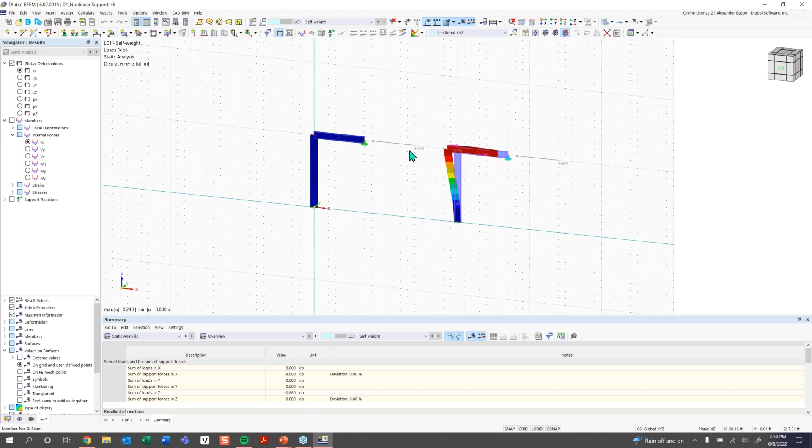And so with this model, you can see here, I just have two frames here supported at the top. And you can see that I have on the right-hand side this nodal support here in blue. The reason why this nodal support is in blue is because it's telling me that it's a nonlinear support. So anytime you see a support that's blue and not green, that means it's a nonlinear support. Green means that it is a linear support.

So let's double click on this support and see what's going on and edit it. And you can see under our definitions here, everything looks normal. All 3 degrees of translational freedom are fixed here. Our rotation about the global z-axis is fixed. But for the x direction, we have a nonlinear set.

So if I click on this drop down here under nonlinear, you can see I have checked on failure if negative px. And what this means is if this support experiences a negative support reaction, it will fail. So it'll fail, it'll disable, it won't add any support if a negative support reaction is activated.

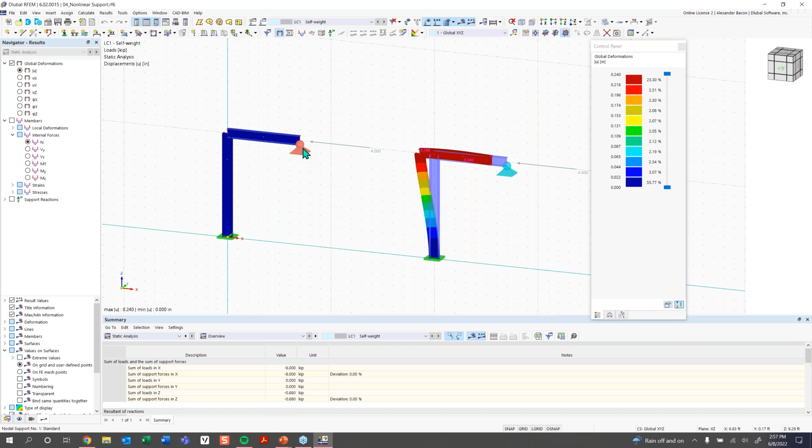And you can see here on the right-hand side that our nonlinear support with the same setup is failing because it's experiencing that negative support reaction. And so it's disabling, and you can see how that affects our frame here. We can also take a look at our support reactions by turning on support reactions here, and we can see those support reactions from the forces there.

So before I get into the next example, it looks like we're approaching 3 o'clock, so I think we can take a break soon. So Siska, are there any questions from the chat? Yeah, we only have one question.

Someone asked if it's possible to assign hotkeys to a command. Okay, yeah. Yeah, that's possible in RFEM. You can assign hotkeys to a command, which is actually pretty helpful. To do that, let's say we wanted to change the command of the save function or something like that, you can go up here to the

customize menus and toolbars, and we can go under, let's say, tools, and let's say we wanted to add a keyboard shortcut to the measure function, for example. You can add a keyboard shortcut to any of these functions up here by just double clicking on them and then entering the shortcut on your keyboard, and you can set that. And so that's how you can assign hotkeys to any command within RFEM.

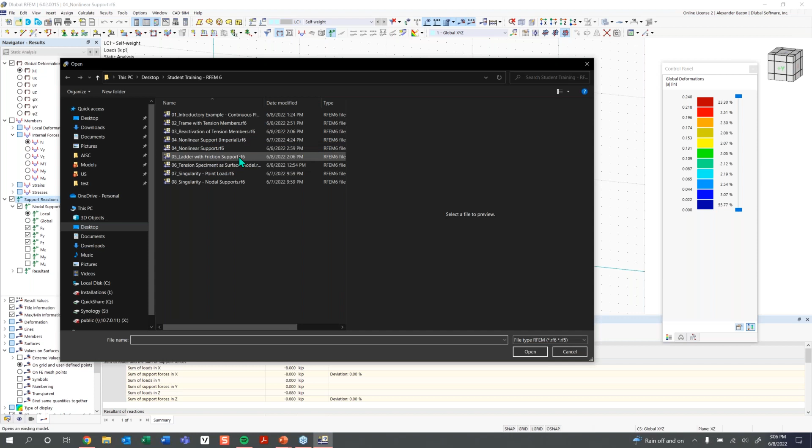All right, so looks like it's 3:06. Let's get right back into it. I'm going to go back to RFEM. So that was the last example that we did. The next example is called a friction supported ladder. So I'm going to open up this next example here, and we're going to talk about friction supports.

All right, so here you can see I have modeled and created this ladder here. And you can see that each load case here has a load that's set to each step here. So I can go through each load case, and you can see that with each load case, the loading gets higher and higher on this ladder. And the goal of this is to see if the ladder is going to receive too much vertical load and if it will slip into the X direction.

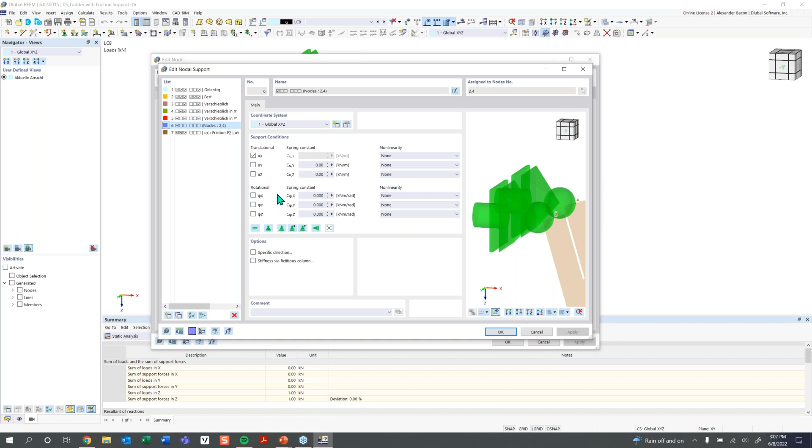So you might have noticed that the top supports here are green, so they're linear. You can also see that they are only supporting the top of this ladder in the X direction. They're not supporting it in the Y or Z direction, and they're not giving it any rotational support. So we're basically assuming that this ladder is just resting up against a wall like a normal ladder would.

And we're wondering, at what point will this ladder slip the higher somebody climbs it? We want to make sure that the friction at the bottom is enough to keep this ladder from slipping out into the X direction. So what we did is we made these supports down here nonlinear supports. So if I edit these supports by double clicking on them and looking at the definitions of them,

you can see that there's no rotational support. They are fully fixed in the Z direction, so they're resting on a solid surface, but this ladder could slip out in the horizontal or lateral direction. So in the X direction and the Y direction, we have activated the nonlinearity friction PZ. Activating these, you can see that now we have some new tabs up here for UX friction PZ and UY friction PZ.

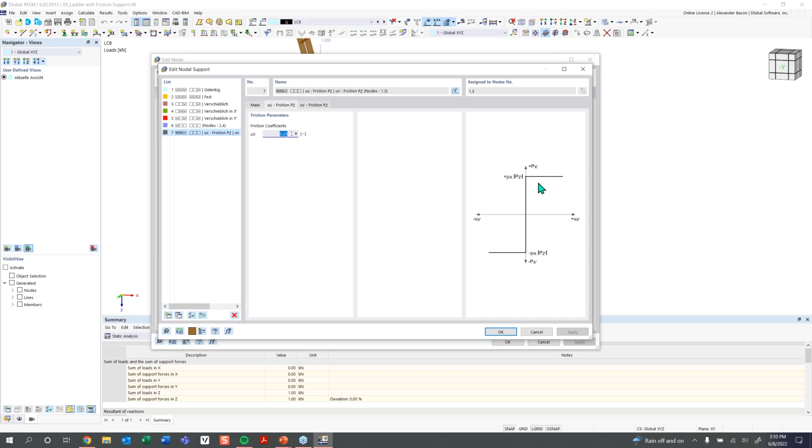Now if we look at UX friction PZ, you can see that we have entered a friction coefficient, μx, set to 0.2. This basically sets a maximum bearing capacity for the support. If the reaction in the X direction exceeds the normal force, Pz, multiplied by this friction coefficient, then the support will fail. So basically the ladder will slip out either in the X direction or the Y direction. Again, this maximum bearing capacity relies on the normal force multiplied by the friction coefficient. If the reaction in the X direction exceeds that, this support will fail and give out.

So let's see. So if we click OK, let's click OK again, and let's run all of our results and see what happens. So just looking at the deformations, we can see that for this first load case, where our loading is applied to the bottom rung here, we're fine; the ladder is staying in place.

But as we go to our next load case, as the force starts to go upwards, we can turn on our support reactions and see what our force is in the x direction. You can see we're at 0.03 here, and we're at 0.5 here for the normal force, and as we increase our loading higher and higher, you can see that reaction in the x direction is increasing, 0.05,

and as we go higher, 0.06, 0.07, 0.08, 0.09, and boom, at load case 12 here, as we approach about 3 rungs down from the top of this ladder, you can see that our supports have given out, and the ladder is now slipping out because we have reached a reaction force in the x direction of 0.10

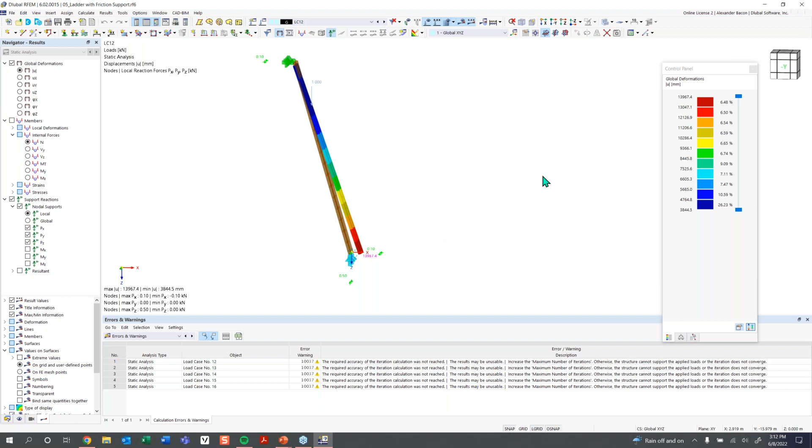So moving on to another example, our next example is going to be all about plastic analysis. So I'm going to open up the next model here. So this model is basically just a specimen of some sort, similar to something you would see in one of your material labs. So we can use this to go over the general concept of plastic analysis.

So the elastic deformation in a structural component is due to a load and is based on Hooke's law. And Hooke's law is the linear stress and strain relationship which most material goes through if it is a linear elastic or isotropic elastic material. So you might want to take a look at what happens after the elastic behavior of the material.

So maybe you're curious what happens after that material is no longer elastic and has entered the plastic region. You might want to see how it's yielded and what the behavior of that component is going to be after it has yielded, and that's basically what plastic analysis is. And this is a nonlinear behavior, and to use plastic materials in RFEM, right now this material is just an isotropic

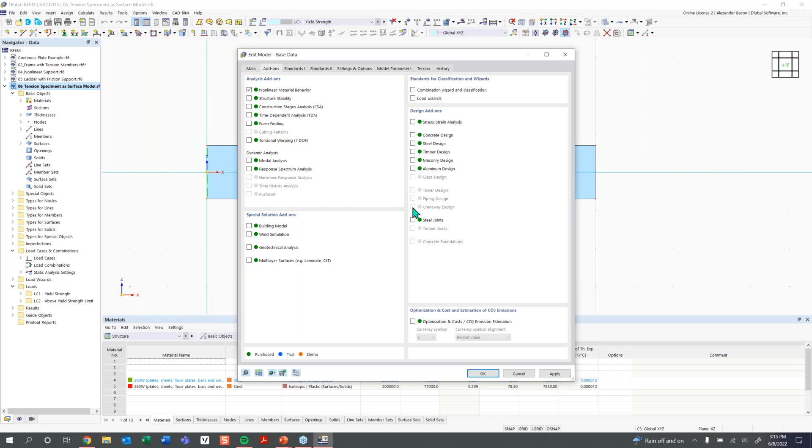Anyway, once we have this add-on activated, we can consider nonlinear behaviors. So we'll click OK, and now we can take plastic materials into consideration. And so now let's run the calculation for this surface with some pre-made defined materials. So if I double click on this, we can see the thickness of this plate or specimen. It's 3 millimeters thick.

And you can see the material we're going to be using right now is an isotropic linear elastic material. I have another material defined here, and this one is an isotropic plastic material. So first we'll choose the isotropic linear elastic material and click OK. So now our material is set to that isotropic linear elastic material. It is just steel 260W.

And now with our load case here, we can just run the calculation. You can see I have a line load applied to the end of it, and we have some supports on the left-hand side here. So this line load is going to pull this specimen in tension, and we can run the results and see what that looks like.

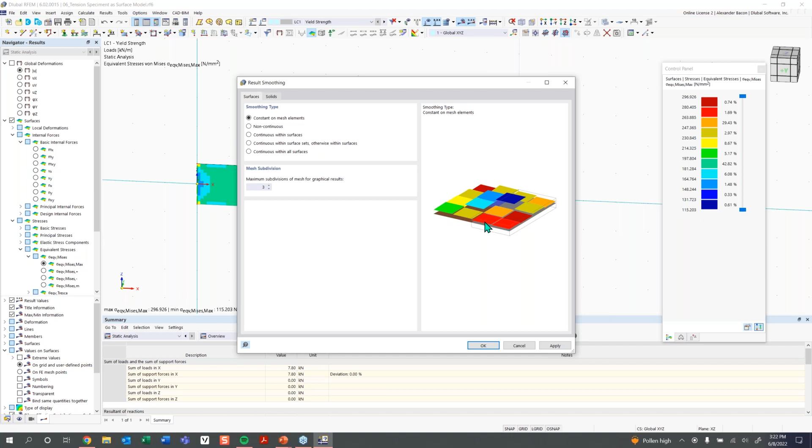Normally, again, by default, this is set to continuous on surfaces, and you can see how each FE mesh element can take into consideration the results from surrounding elements, but we just want to see the average of each FE mesh point on one single finite element. So with that said, we can click OK. And so now we can see the areas of the element that are higher than 260 newtons per square millimeter.

So with my control panel here, we can see the color coordination. I can zoom in a little bit more, and you can see we have that maximum loading applied, and you can see these red and darker red areas right here at the very top around these locations, in which this plate is experiencing higher stresses than 260 newtons per square millimeter.

And what we can do to even better visualize this is we can double click on the color panel here, and we can set a limit here to 260. And now you can get an even better visual of where those areas are where the material is exceeding that yield strength.

So you may be thinking this is steel and it's an isotropic material, and this can happen if it exceeds that yield strength. This limit can't be exceeded. That's the yield strength. So these stresses wouldn't be shown realistically, and they wouldn't be passing 260 newtons per millimeter squared. But we were getting stresses higher than that.

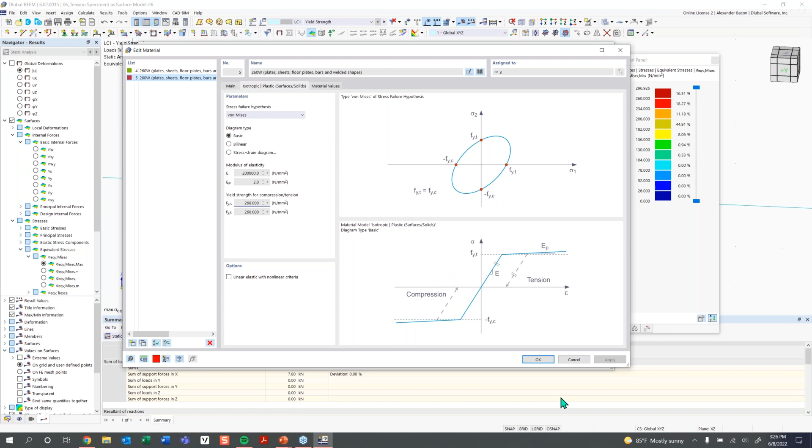So now let's run the calculation again, now that we have set our material to a plastic material, and let's see what that's going to look like. So this is interesting. Now you can see our highest stresses while viewing our von Mises stresses on the surface are 260 newtons per square millimeter. So perfect. This is awesome. Since this is a plastic material, no points on this plate should be experiencing stresses higher than 260 newtons per square millimeter.

And basically this is because now the stresses can be spread out and cannot exceed 260 newtons per square millimeter. And we can see where this plate is basically yielding. So it's hitting that max there. And then we can go over here on the left-hand side, check on criteria. And now you can see even better where this plate is yielding. Wherever 1.0 is, where this dark red is, that means these sections of this plate have fully yielded.

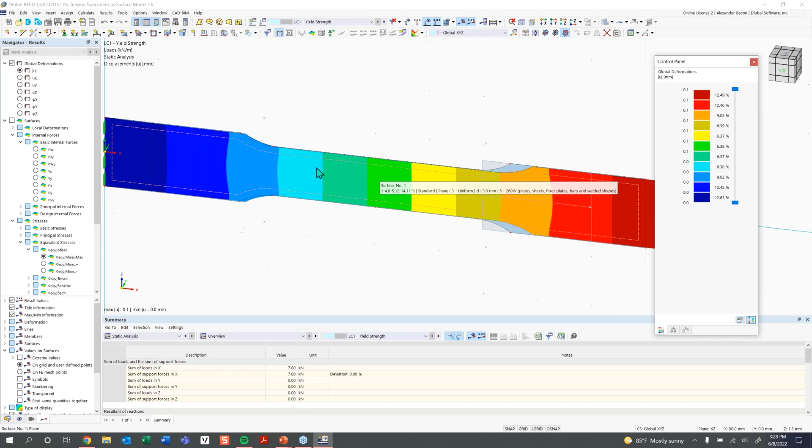So now let's test what happens when we set a load here that is higher than the maximum, which I have done already. So if we go to LC2, you can see I have just increased this load a little higher than what the maximum should be, so we can see what happens when we run these results. So now let's take a look at the deformations at the exact limit of what this plate can handle. You can see we have our deformations here and nothing's really deformed too much. It's just experiencing strain here in the X direction.

But if we look at what happens when the limit is exceeded, you can see that where the material has fully yielded, the lateral strain is causing the section to shrink, and we're getting even higher deformations of 4.4 millimeters since this section has fully yielded. And we can even play a little animation here, and you can see the difference between before it's yielded and after it has yielded. So this is something similar to what you might see in your labs when doing your material testing. And these are the kind of nonlinear effects that you can consider with RFEM 6.

So now we can move on to our next and last subject, which is singularities. So what are singularities? Where do they occur? Singularities are points of discontinuity in the calculation model. And this is an issue that doesn't only occur with RFEM 6. This issue happens in all finite element analysis software.

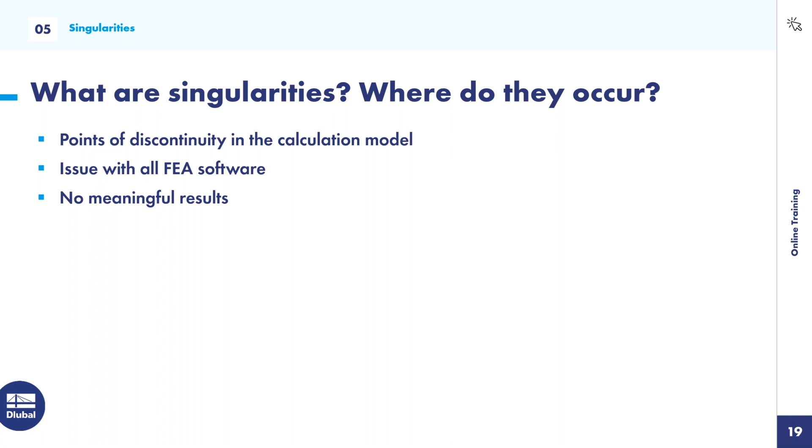And the result that comes out of a model at a singularity is not meaningful or plausible and should not be taken into account. So what this means is that there is an issue with how RFEM solves the model.

There's no real physical issue with the structure. It's just how the software is solving the model. So this causes infinite stresses and internal forces at a singularity.

You'll see very high stresses, very high internal forces at that singularity. So mesh refinement, or increasing the mesh refinement, is not going to improve this result or help at all. It does give you, though, a better idea of the location of that singularity.

Types of singularity locations: point loads, line loads, and line supports can cause singularities. Openings or reentrant corners or connecting corners can cause singularities. And stiffness changes due to a quick change in material or thickness can also cause singularities.

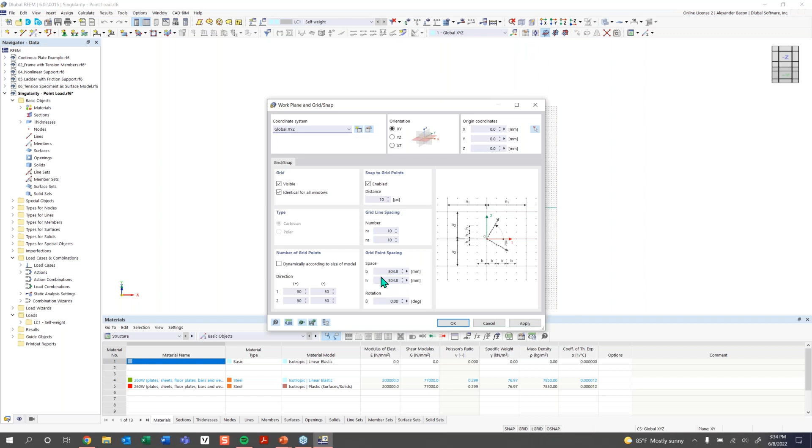Now you'll see our grid here, 50 by 50. Let's check our units. We will switch our units to imperial. So now we have our grid spacing in imperial, all of our units in imperial, and our grid spacing as 1 foot by 1 foot, 50 by 50.

Now what we want to do is just create a concrete surface, kind of like what we did before. I'm going to create a new thickness. You can see we have some materials and thickness carried over from previous examples. I'm going to click on new material, which opens up the material library.

Now I'm just going to type in concrete. I'm going to make this concrete 4,000 PSI, and click OK. And we want the thickness of this to be arbitrarily 12 inches.

Now we just need to draw out our surface here. It's going to be similar to the plates we've drawn earlier. So we're just going to make it 32 by 16.

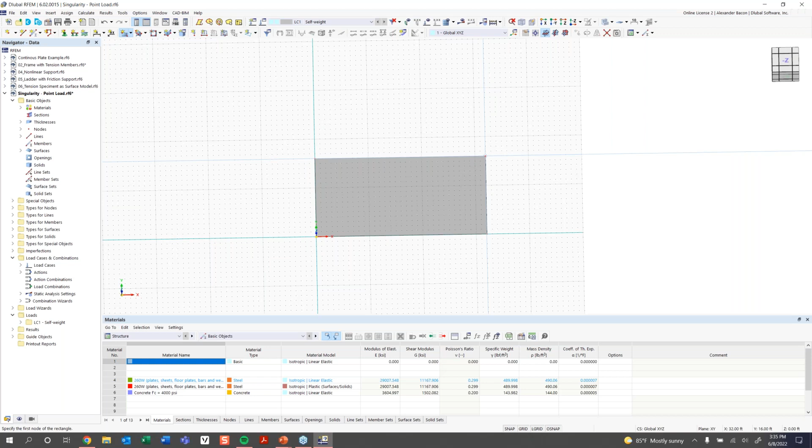Now what we want to do is add a node directly in the middle here. To do this, the easiest way is we have a tool up here under new node called between two nodes. I can click on that, and all I need to do is click on my two nodes here and click apply. Now I have a node directly between those two nodes at the center.

And what we want to do is add a point load to that. Now I'm adding a point load directly at the center of my concrete surface here. Set that to negative 10 kips in the global z direction. And we can apply that right to the center there.

Then we can just add line supports. We just need to support this now, so we're going to support the entire edge of this plate here. I can just highlight the whole thing, go to line support, and choose the preset hinged.

Now we can make 4 copies of this. We can highlight it, right click on it, move/copy, create copy. We want 4 of these, so we'll make 3 additional copies, spaced out at 37 feet in the X direction.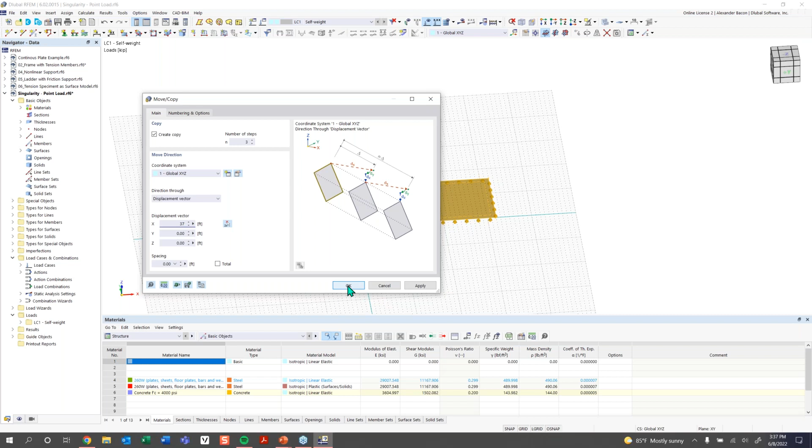If we didn't want to move our plates over, there's another option under grid settings to have the grid dynamically change according to the size of your model. So we could choose that. Now you can see our grid here has dynamically rearranged itself to our model. We don't really need the grid anymore, so we can deactivate that.

Now we can create some FE mesh refinements. Another way to do that is we can go under structure, basic objects. I just want to show you how to create these FE mesh refinements through the table, or how to use the table. So under structure, we can go under types for surfaces, and then find the tab surface mesh refinements. And RFEM wants me to save - always good to save.

Never want to have something happen and you don't have your model saved. There's always backups created, but it's always good to save often.

Target FE length is going to be, for this first mesh refinement, 7, and then we're going to make 4, 1.25, and 0.4 feet. Since we know this is surface 1, I can turn on the numbering to see it displayed. Show numbering, so now we can see surface 1, 2, 3, and 4. We want to assign the 7 feet to 1, 2, 3, and 4, so now our refinements are created here and assigned to our surfaces.

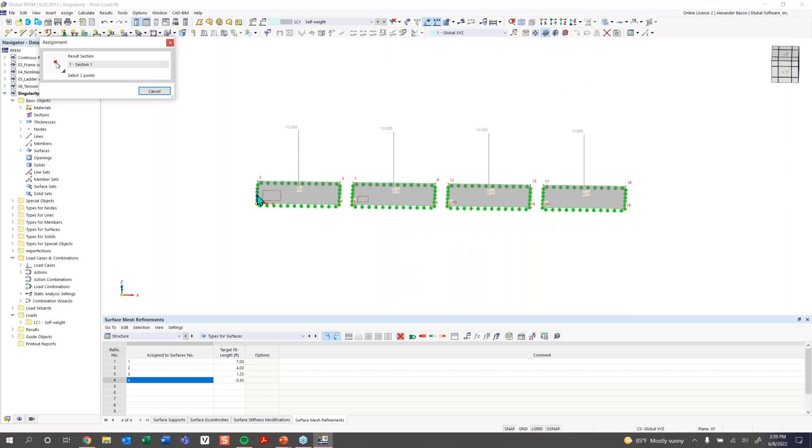Now we just want to create a results section through our surfaces, so we're going to define that. Click OK. You can see our LC1 here, we want to edit that to not take into consideration self-weight, so let's deactivate that. We'll just not have a name for it. Now let's run our calculation and see what happens.

Once our calculation runs, we'll get a better idea of what this all looks like. First, before we look at anything, let's make sure results sections are activated, which they are. Then we want to go down to our result views under results sections, and activate local extremes. Now we can see the extreme of each surface here. Our deformations look okay, they look good, nothing out of the ordinary here, so that's all right. Again, you can see our FE mesh there.

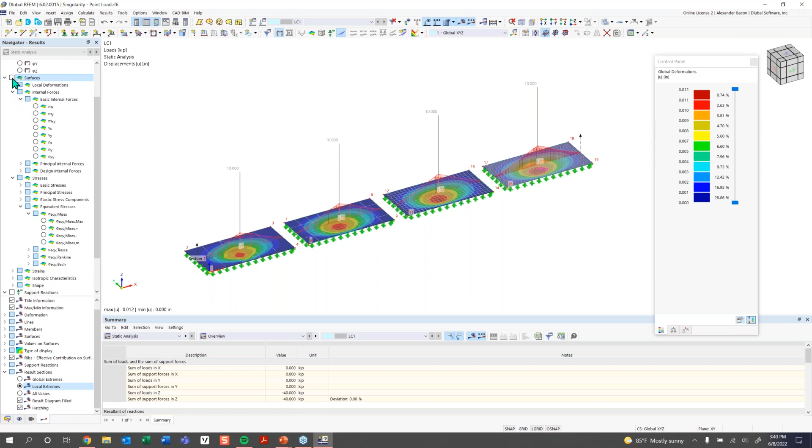Let's take a look at our bending moments on our surface here. I'm going to activate surface results, moments along the local x-axis, and we can see our bending moments there. We have on the left-hand side negative 2.9 kip feet, and we have a maximum over here of negative 5.59 kip feet.

So like we talked about earlier, we know that a finer FE mesh is better than a very coarse FE mesh like this left-hand side here. But which moment is the correct moment here? The answer is none of these. None of these moments are the correct moment, and that is because we are experiencing singularities here. So these results are not meaningful or useful, and we cannot use these results. It really doesn't matter what size our FE mesh is here.

None of these results are good, even this one here that's super fine. You would think I have a super fine FE mesh here, this result has to be accurate, but it's not. It's just giving us a higher result, and it's allowing us to see more clearly where this singularity is happening. So what's the solution?

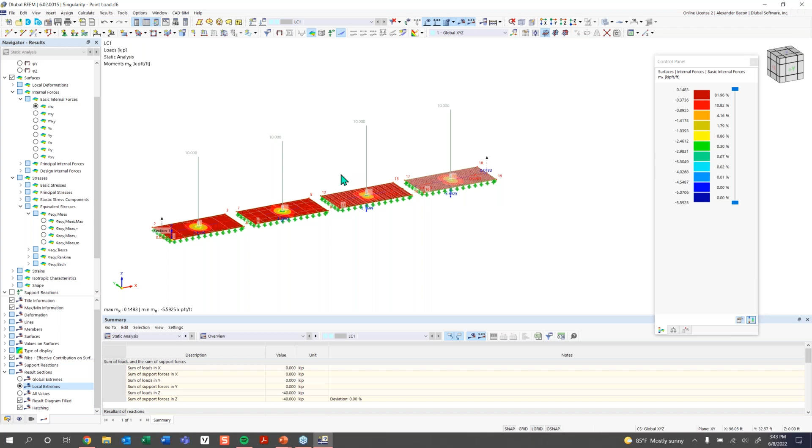The solution is to take this point load here that's feeding directly into one single FE mesh element and distribute this point load somehow. To distribute this point load, we can spread it out using a surface load. So we can take this load, this 10 kips, and pretend that this load is a column, and the area of the column is 2 feet squared. So let's delete these point loads.

Yes, and we want to now apply some surface loads. So before we apply the surface load, maybe it's a good idea to show you what the rendered thickness of one of these surfaces looks like. If I go down here into the display tab, under model, I'm going to decrease the size. I cannot, so we're going to go under model here, rendering, model, solid model, surfaces, and we want to choose filled thickness. You can see that the thickness of these surfaces, the center line is located directly in the middle of the thickness, so you can see what the actual thickness of these looks like.

The reason it's good to know where the center line is located is because this is where the surface load is applied. Normally for concrete structures, the forces will propagate from the location of the load through the concrete at a 45-degree angle. So it's always good to keep in mind that the loading is going to be applied at the center of the thickness.

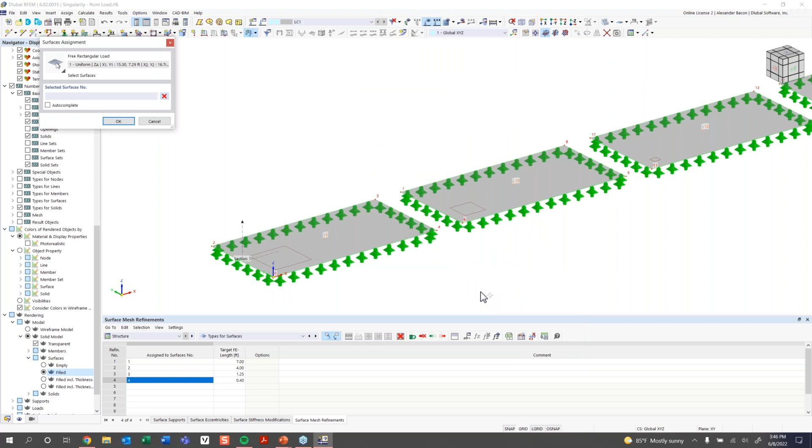And now we can click OK, and then we can just click on each one of these surfaces here, click OK. And now we have our free rectangular load here. I need to give it a negative sign to flip it, and also assign to, we got to keep it at the center.

It's fine, we'll click OK, flip it, and now we can just take our load here, hold Control, and just move and copy it to our other surfaces. So now we have our free rectangular load here applied to all our surfaces. So we can hit calculate.

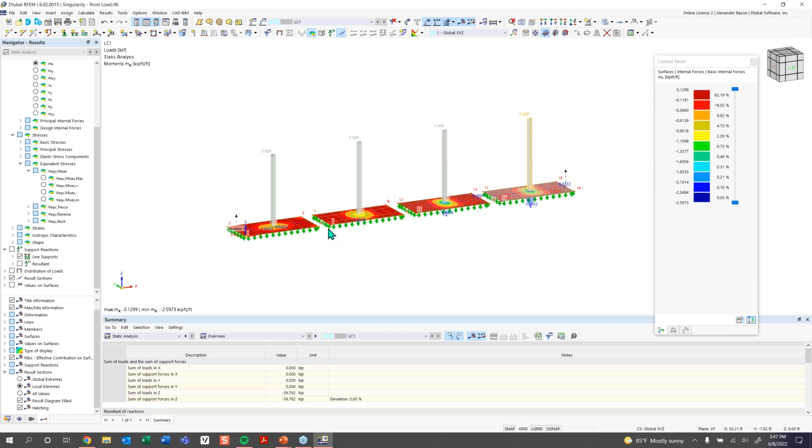And this calculation will run. And so now we can take a look at our moments here. We got to activate, take a look at our moments here. So now we're getting no singularities because at every surface here we have similar moments. It's not as drastic a change, but you can see between these last two surfaces, 1.9 and 2.3, definitely a lot better than before.

This is one of the ways you can combat point loads when they cause singularities. Again, you can see that our loading is not just feeding into one singular FE mesh point. It is being distributed across multiple FE mesh elements, which means we are avoiding a singularity issue. So it's always good to know multiple FE mesh nodes is better than just one.

Another way to combat singularities, if you have a results section, is to go into the result diagram, and maybe you're analyzing your results there. There's a tool in here which allows you to smooth over results or average them out over an area, which is called smooth areas. You can see smooth areas are turned on right now.

But what we can do is edit our smooth areas, and we can choose a range. So we need to tell the program between what location and what location the smoothing needs to happen. Usually this smoothing range is based on a connecting element or a connecting column, so the range would be the length of that column. We're just assuming our column is 2 feet squared, or 1.41 feet by 1.41 feet.

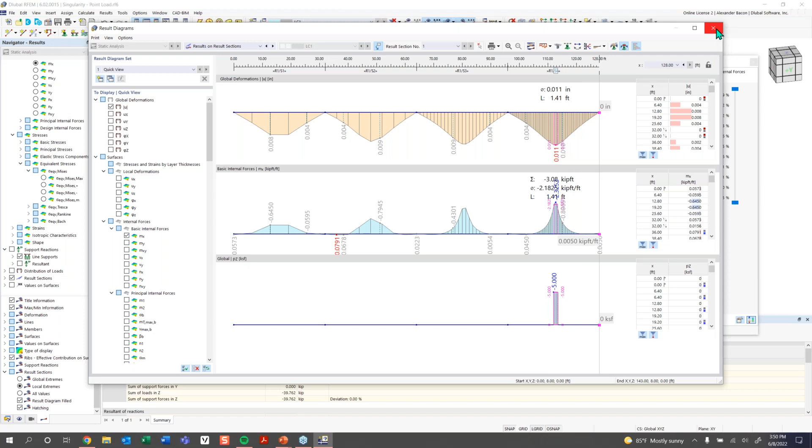So I'm going to exit out of that. And the next example, this is the last example I have. Normally I would model through it, but we're running low on time, so I'm just going to open an already saved model that I have here, and we can go over it.

So here, you can see this is similar to our last model, but with this model, we have, turn off the results here and shrink. Usually we would model through this, but we're running out of time, so I'm just going to go over this. We have a plate here, and each of these plates has a surface load applied to it.

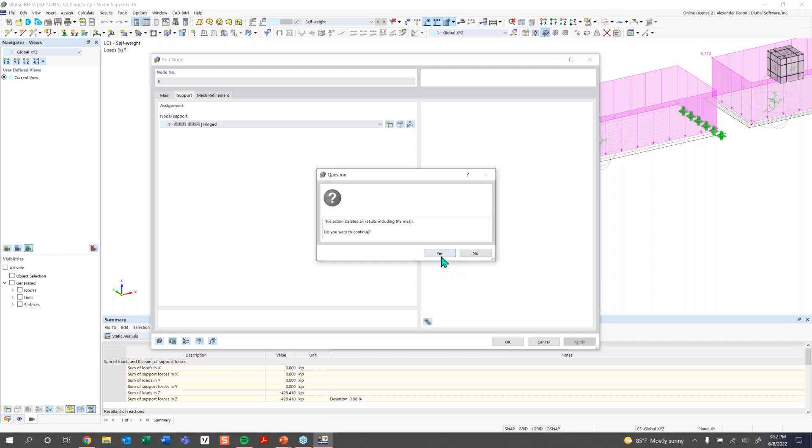You can see we have a nodal support connected here, so we just have this nodal support supported on this edge. And what's happening is this nodal support, if I change it to a normal hinge support... alright, one second.

Okay, we're just going to create a new nodal support here. We want it to just be a normal hinge support. There we go. And we'll change all of these to hinged.

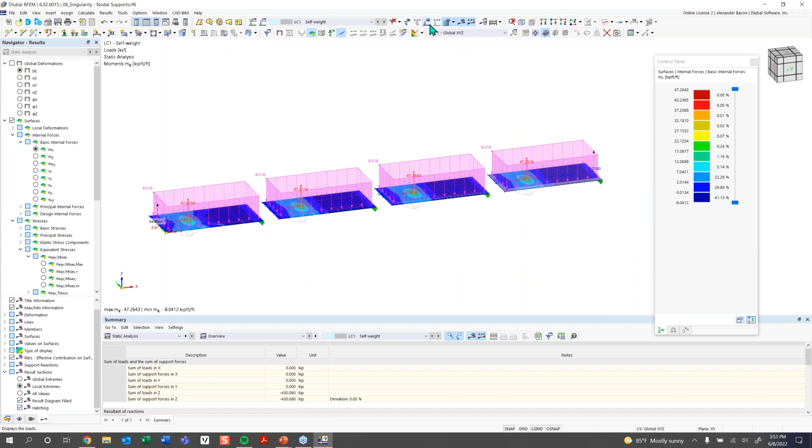Okay, so if we run our results now, all we have is just this one nodal support holding up our plate here. And again, if I turn off the loading, you can see, well, we should be seeing a difference in results. I think I need to delete these.

So once we run these results, we should see a singularity. There we go. Okay, so now you can see a singularity occurring at these nodal supports because there's only one point feeding into one FE mesh node, and you can see how drastic the results are, 22 versus 35 here.

So you can see how drastic these results are, and so you always have to be careful when using nodal supports and having them support a surface like this, because since they are completely rigid supports, all of the loading is going to be fed into this one single location, and that's also going to cause a singularity.

And one way to combat this is to change your supports from completely rigid to being semi-rigid and having less of a stiffness to them. Or you can also use the smooth ranges within the result diagram.

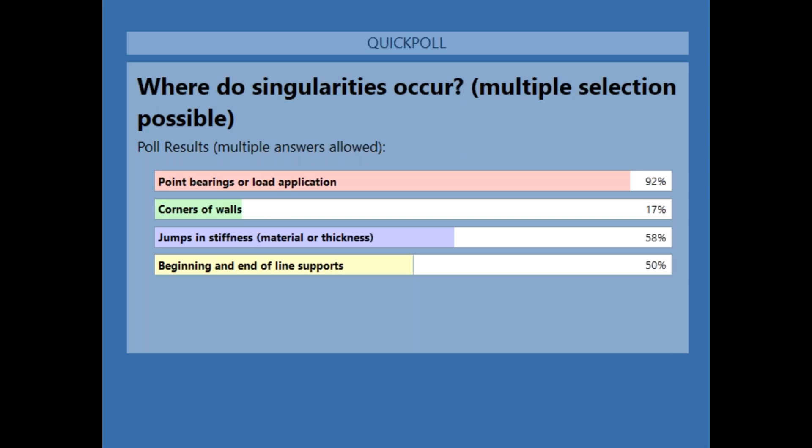So once you click on that, you can see here. Alex, can you show your RFEM? We're still seeing the poll. Oh yeah, thanks, Siska. I didn't see that. Sorry about that.